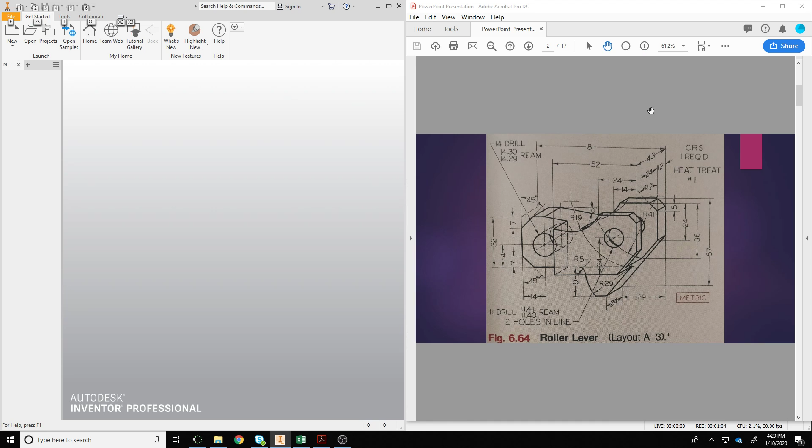This one, 664, the roller lever. This one is kind of easy. Let me zoom in so we can see it a little more clearly.

Let's look at it. It is in the metric system. Its overall height is 57 millimeters. Its overall width left to right is 81, and its overall depth front to back is 43. Looking at it, it has two major holes, one going through the back and one going all the way through here. And it also has this big cutout here.

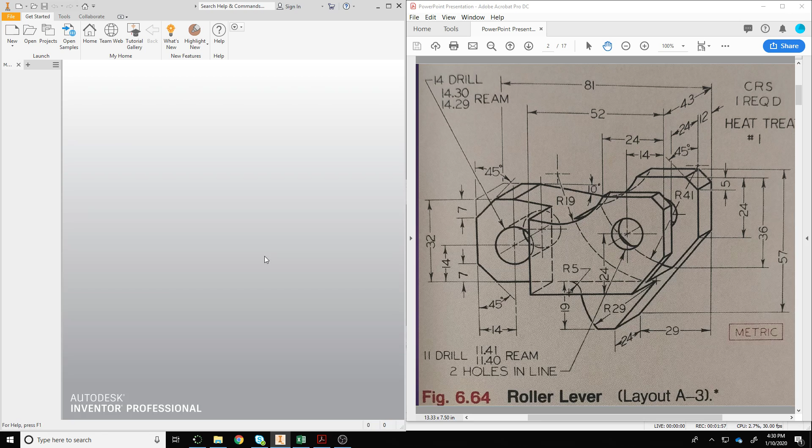It does have some fillets, a fillet here, a rounded edge here. It has some angles, some chamfers, another rounded edge or fillet, an angle, and some chamfers. So looking at it, it is relatively easy, but if we break it down, it could be considered a little bit difficult, but that's why we broke it down, so it's not as intimidating.

So it is in the metric system, so I started a standard MM IPT. I'm going to put a sketch on the XY plane, and I'm going to be using this as my origin. This is where I'm going to be starting everything off.

So I'm going to make a circle right here on the origin that has a diameter of 14 millimeters. I know it does say drill, it has these other things, 14 drill, 14.3, 14.29, ream - that just means to make it a little bit bigger, so a 14 millimeter diameter something can fit in there that's 14 millimeters. So everything else is just going to be based off of that.

I'm just going to draw the general shape so you guys can follow along. I know that this is at an angle this way. I'm going to make an arc because I know this is curved, so it's going to look something like this. Another line straight out. Let me ignore that, let me continue making this line down at an angle, back.

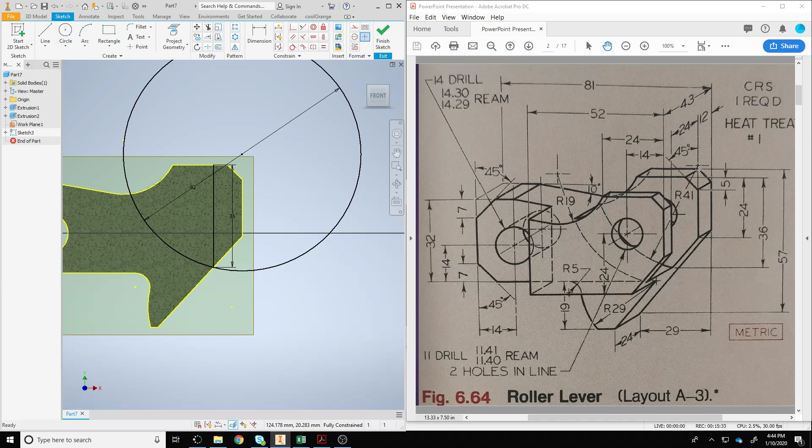So as you see, 36 right here, that's that endpoint. The center line is lined up right here with the edge of the part. All of that makes sense if you're paying attention to the drawing, and if you're not, you're at least following along with my video.

Okay, so we're going to cut this out. We're going to cut, not through all, cut 24, cut, change directions. Why aren't you cutting? Okay, try again. Cut. Okay, why? As you can see, I do have a love-hate relationship with Inventor. Sometimes it works when I want it to, sometimes it doesn't.

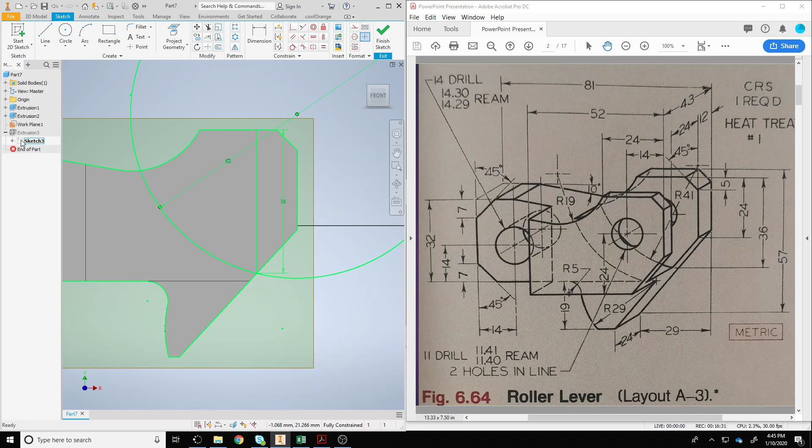Okay, let me try this again. Let me delete consumed, and try this again. Select that and that, cut 24. There we go. Okay, so because we drew this line right here, it wanted to separate these two sections because Inventor is the inventor, and there we go. That's exactly what we needed to happen.

I'm going to right click on that plane that we created and take away its visibility, so that way we see this. Now the last thing we need to do is put in that hole. I'm going to make a circle, the size of this hole is 11, and then I'm locating it 24 from the bottom edge, and 14.

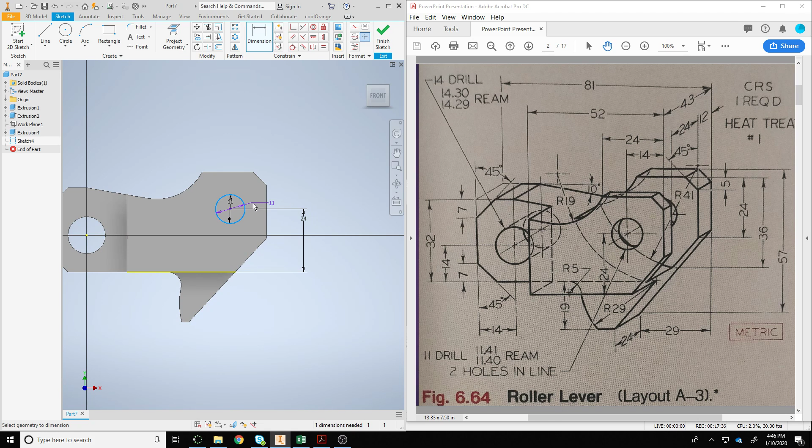Once you have that, we're going to extrude through all, and we're cutting, and there you go. So let's save it. We're going to save this as 3-2.1, 6.64, roller lever.

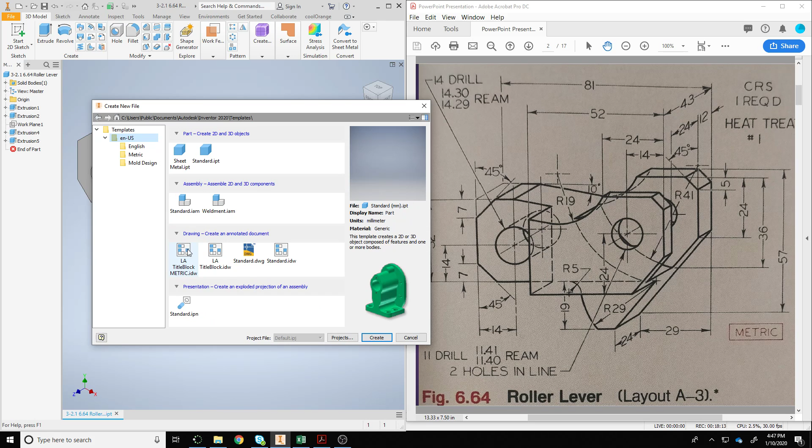Okay, so save. Let's put it on a sheet. Go to your ENUS template, and this is in the metric system, so go ahead and click on Create. And because this does have quite a bit of dimensions, we are going to change the sheet size to a B size sheet.

So do that now. And this is going to be out of place, so let's move it over, and let's move this and that, and yes, let's put a side view or an isometric view, and it forgot to put hidden lines, so when it does that, double click and make sure your hidden lines are turned on. Okay, and let's put in our center lines. This part does have center lines, so center marks everywhere on everything.

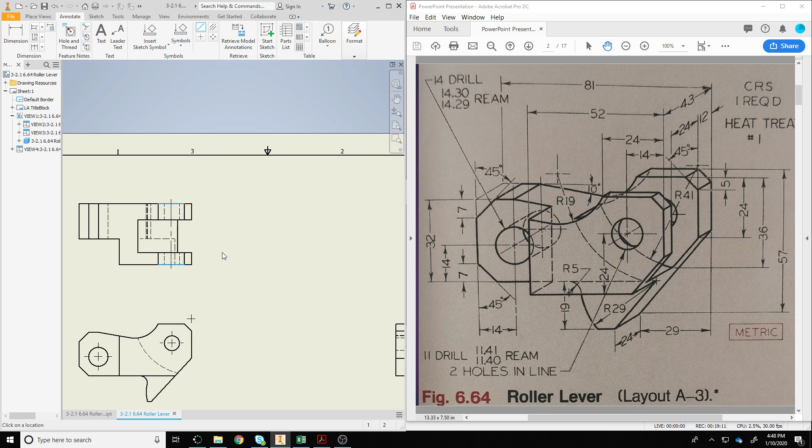And then there's a bunch of center lines that should happen here, but that's really confusing, so you don't have to do that. But put a center line on the top and a center line here as well.

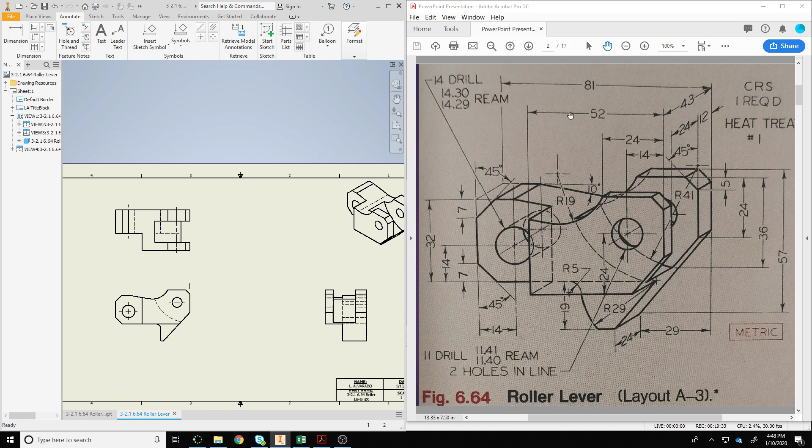Now, the dimensions are all pretty straightforward. You guys can do this all on your own, so if you do need help, please let me know. I'm sorry that this was a little bit harder for you guys to do. I apologize. So if you guys need help, please let me know. Thank you.